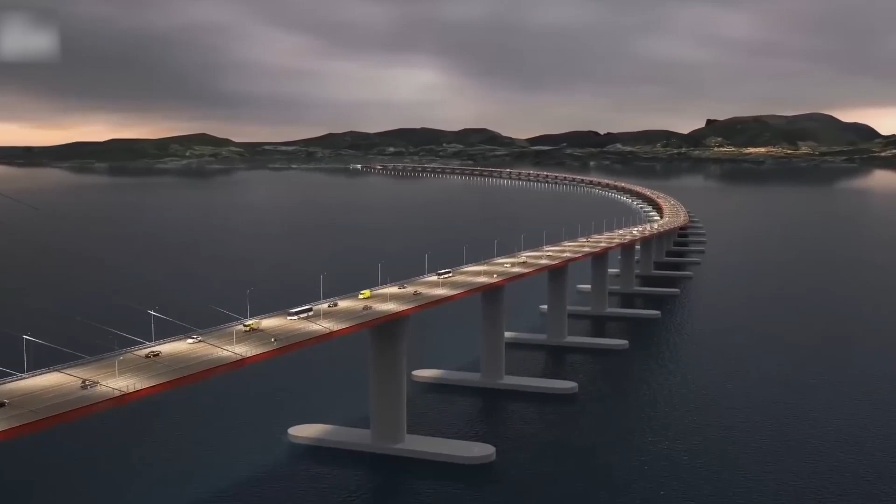Norway is no stranger to impressive feats of engineering, but the country's latest project is taking things to a whole new level. The $47 billion underwater floating highway known as the Coastal Highway Route E39 is set to be the longest and most complex transportation infrastructure endeavor in the nation's history. This mind-boggling project will feature submerged floating tunnels, bridges, and traditional tunnels, all designed to navigate the challenging terrain of Norway's fjords and mountainous regions.

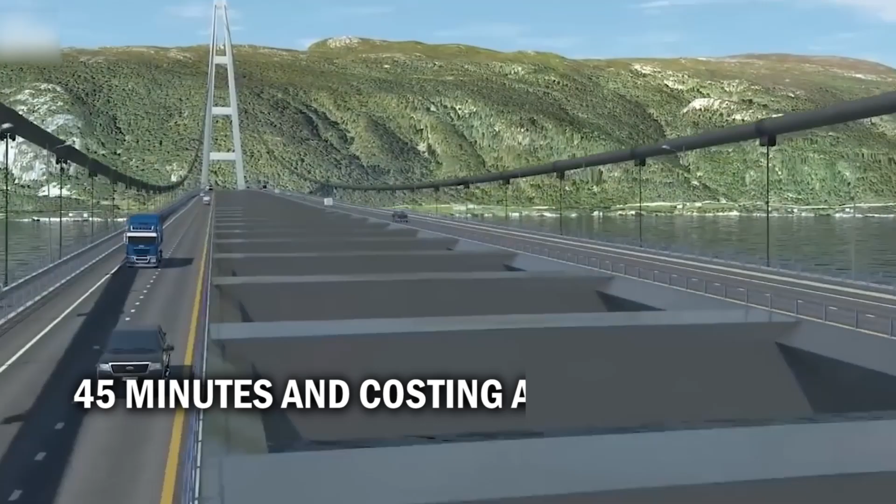The vision. Norway's vision for the E39 coastal highway is a bold one, aiming to transform transportation along the country's western coast. At its core, the project seeks to drastically improve connectivity and reduce travel times between key cities and towns. By eliminating the need for 7 ferry crossings, each taking around 45 minutes and costing about $16 per trip, the new highway will cut the journey from Kristiansand to Trondheim from 21 hours to just 11. This seamless, uninterrupted route will make travel more efficient and predictable for residents, businesses, and tourists alike.

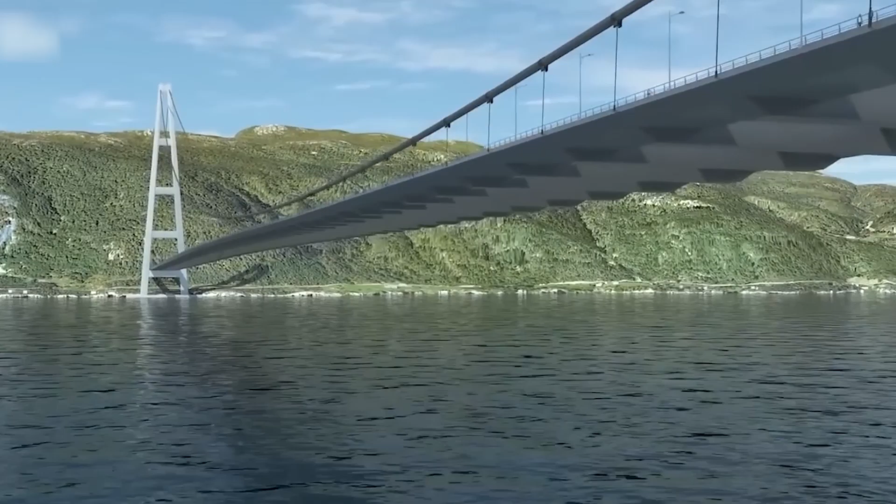But the ambitions of the E39 project extend far beyond mere convenience. The highway is seen as a vital tool for urban stabilization and revitalization in rural and remote areas along the coast. Many of these regions, such as Tysnes, have seen significant population declines over the past century due to their inaccessibility. By providing easier access to essential services like healthcare, education, and employment opportunities, the E39 has the potential to make these areas more livable and attractive, potentially reversing long-standing demographic trends.

The economic benefits of the project are also substantial, with 60% of Norway's exported goods produced along the west coast, where a third of the population resides. Improving transportation infrastructure is crucial for boosting efficiency and reducing costs. The E39 will streamline logistics for goods, making it easier and faster to move products from factories to ports and beyond. This in turn is expected to stimulate economic growth and create new opportunities for businesses and communities along the route.

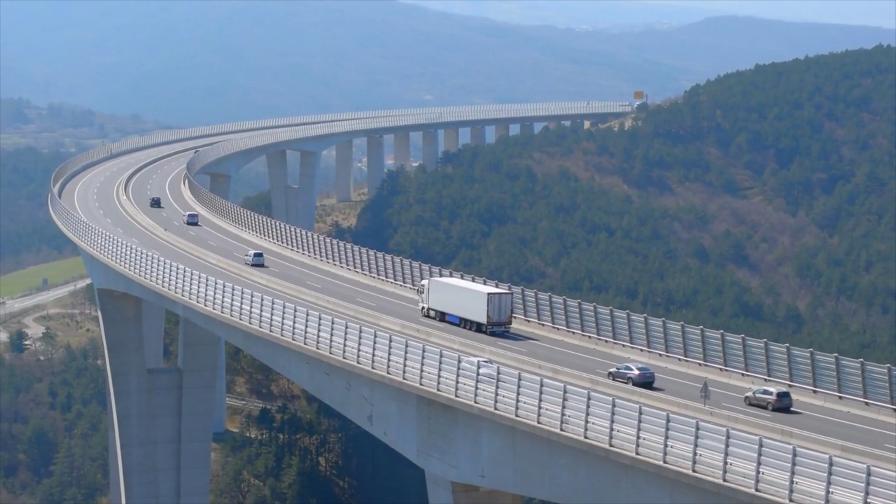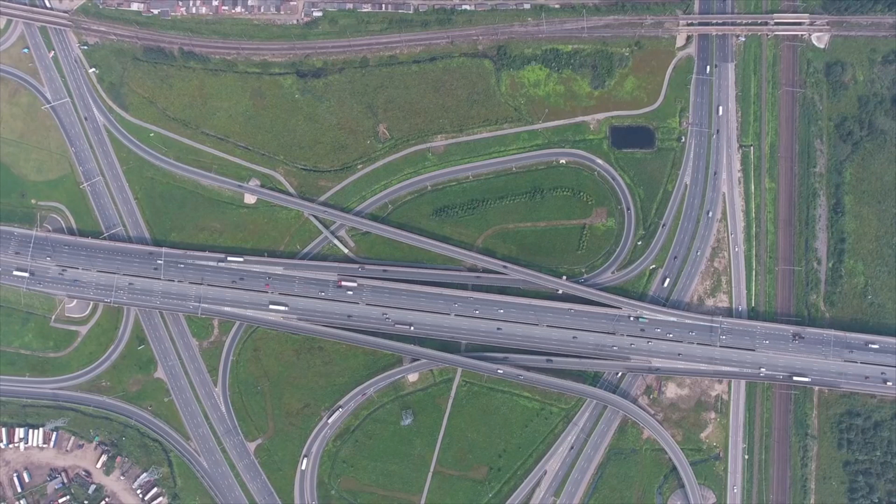Moreover, the E39 coastal highway is designed to showcase Norway's commitment to environmental sustainability and preservation. Traditional road infrastructure, such as bridges and standard tunnels, can have significant ecological drawbacks. The innovative solutions being employed in this project, including submerged floating tube bridges, SFTBs, aim to minimize the highway's impact on the pristine natural beauty of Norway's fjords and coastline. These state-of-the-art engineering techniques not only reduce environmental disruption, but also provide greater resilience against the harsh weather conditions that often lead to road closures and ferry cancellations in the region. As the E39 project pushes the boundaries of what's possible in transportation infrastructure, it has the potential to set a new global standard.

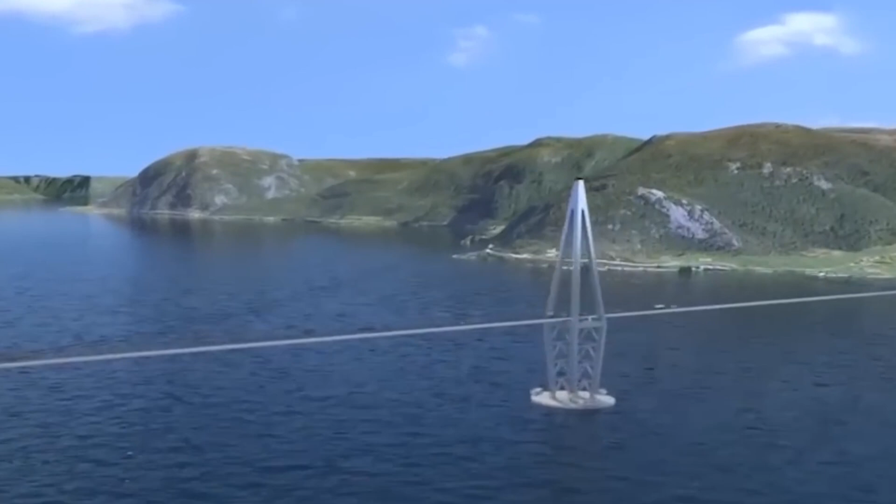Groundbreaking engineering. The Coastal Highway project is a testament to the ingenuity and innovation of modern engineering. To navigate the rugged terrain and deep fjords along Norway's western coast, the project employs a combination of conventional tunnels, bridges, and groundbreaking submerged floating tunnels, SFTBs. These engineering marvels are designed to withstand the harsh conditions of the Norwegian Sea while minimizing environmental impact and ensuring the safety of travelers.

One of the most challenging aspects of the project is the crossing of the Sognefjord, Norway's longest and deepest fjord. Engineers are considering several solutions, including a floating submerged tunnel supported by pontoons, the world's largest suspension bridge with towers reaching 435 meters, and a hybrid design that combines floating pontoon bridges with submerged tunnels. Each option presents its own set of challenges, from the immense pressures exerted on the structures to the potential impact on the fjord's ecosystem.

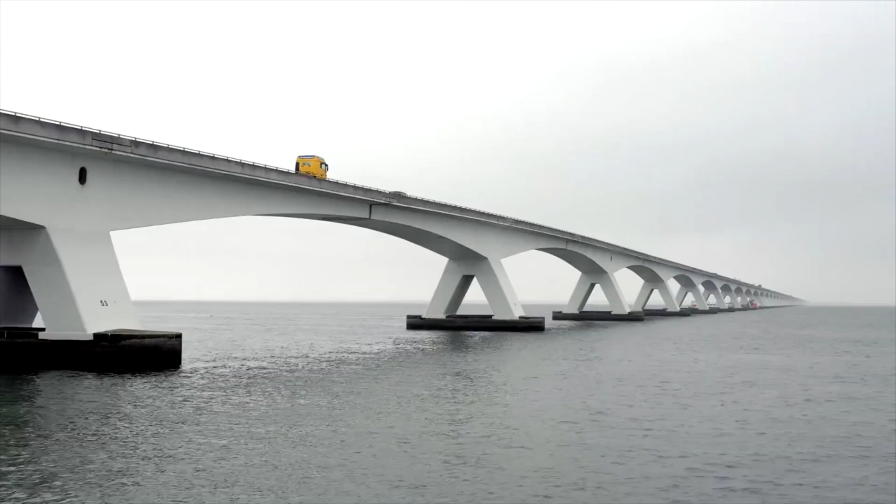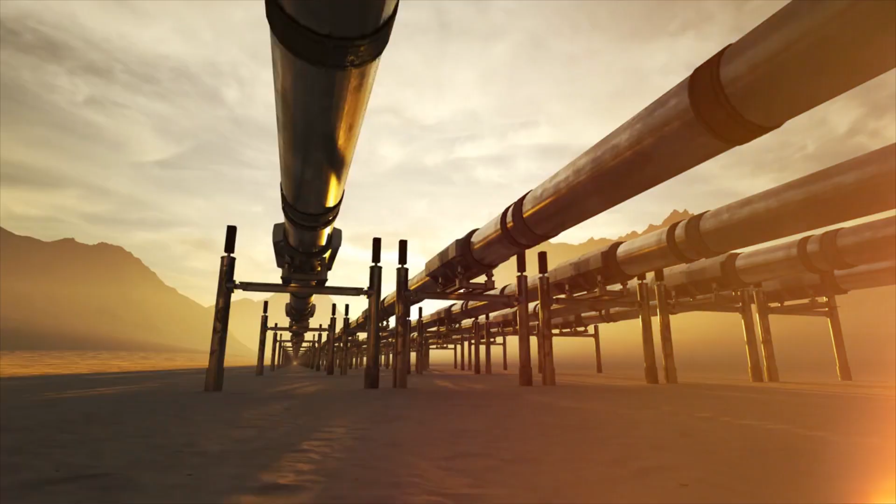The submerged floating tube bridges are a particularly innovative solution. These structures consist of concrete tubes suspended about 100 feet below the water surface, anchored to the seabed or pontoons at roughly 800-foot intervals. This design allows ships and submarines to pass safely above the tunnels while providing a stable, weatherproof passage for vehicles. The tubes are engineered to withstand the immense pressures of the deep water and the constant motion of the waves, ensuring a safe and reliable crossing for travelers.

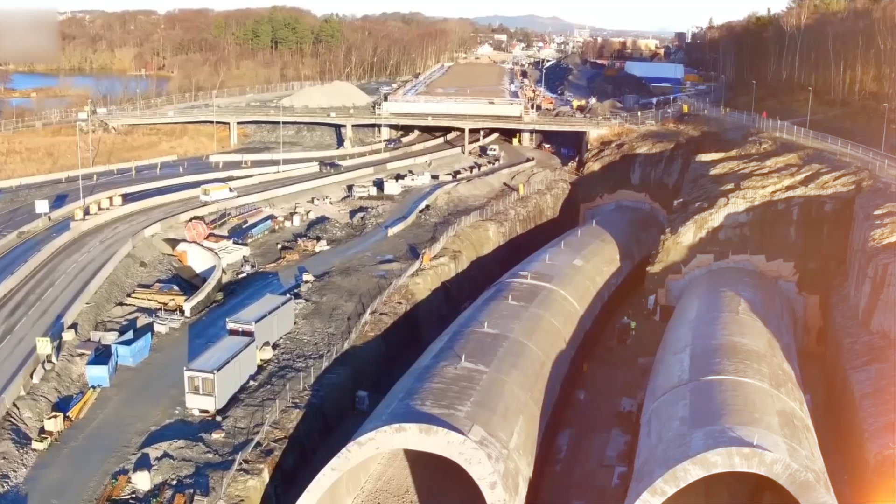Another marvel of the E39 project is the Rogfast Tunnel, which will be the longest and deepest subsea road tunnel in the world upon completion, stretching 27 kilometers and reaching depths of up to 390 meters below sea level. The Rogfast Tunnel is a feat of engineering that pushes the boundaries of what is possible in tunnel construction. The tunnel will feature emergency exits every 250 meters, along with emergency lights and phones at regular intervals, to ensure the safety of motorists in case of an emergency. The construction of these engineering marvels requires cutting-edge techniques and materials.

From the reinforced concrete used in the submerged floating tunnels to the advanced drilling and excavation methods employed in the Rogfast tunnel, every aspect of the project demands precision and innovation. Engineers must also contend with the challenges posed by the harsh Norwegian climate, including strong winds, heavy rainfall, and the potential for seismic activity. Despite the immense challenges, the engineers behind the E39 Coastal Highway project remain undaunted.

They are driven by a vision of a more connected, sustainable, and prosperous future for Norway's western coast. By pushing the limits of what is possible in transportation infrastructure, they are not only transforming the way people travel within the country, but also setting a new global standard for innovative, environmentally conscious design. However, bringing this ambitious vision to life is no easy feat.

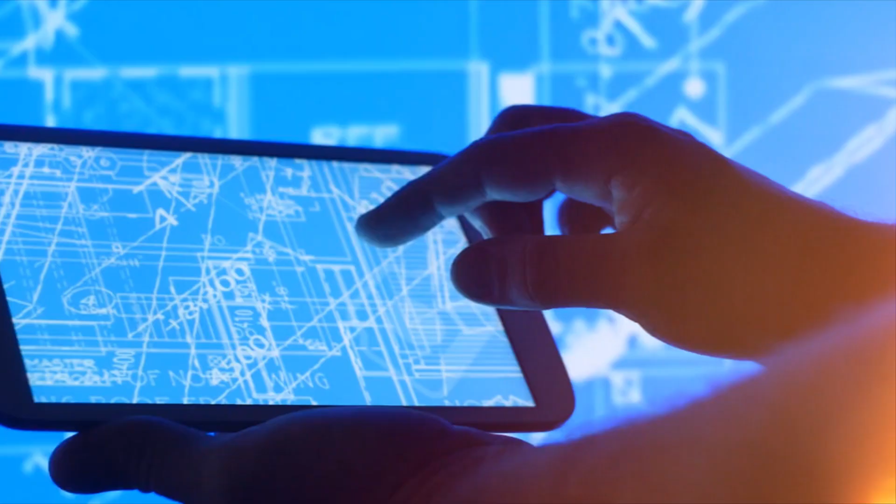Engineering challenges. In addressing these engineering challenges, the team behind the E39 Coastal Highway project has had to devise groundbreaking solutions that push the boundaries of what's possible in modern construction. One of the most significant hurdles is navigating the deep, wide fjords that punctuate Norway's western coast. The Sognefjord crossing, for example, spans a staggering 3,700 meters and plunges to depths of 1,300 meters.

To traverse this formidable obstacle, engineers are considering a range of innovative options, from submerged floating tunnels suspended by pontoons to a record-breaking suspension bridge with towers soaring 435 meters into the sky. The Submerged Floating Tube Bridge, SFTB concept, is a particularly inventive approach to fjord crossings. While the idea itself dates back to the late 19th century, only recent advancements in materials science and engineering have made it a viable solution.

The proposed design involves anchoring concrete tubes to the seabed or floating pontoons at regular intervals, allowing them to sit about 100 feet below the water's surface. This positioning ensures that ships and submarines can pass safely overhead while providing a stable, weatherproof route for vehicles. However, the immense pressures exerted on the structure at such depths present a significant challenge, requiring engineers to carefully calculate and reinforce the tubes to withstand the constant stress.

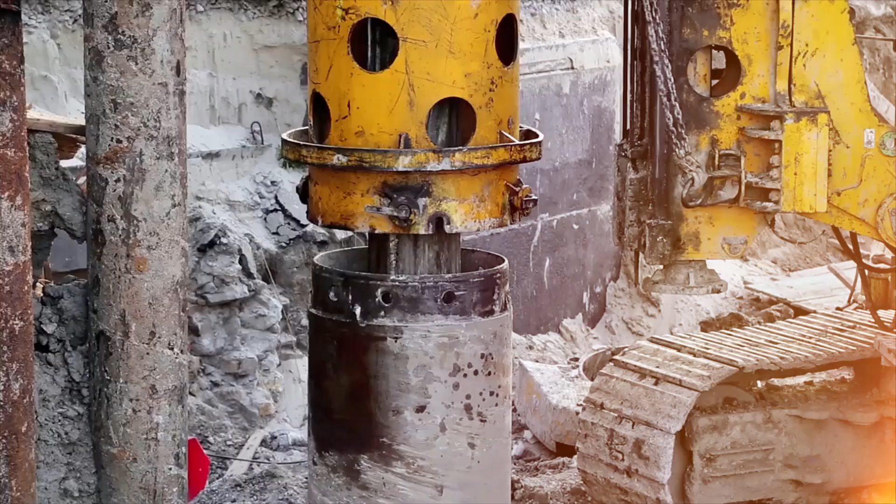Another major engineering feat is the Rogfast tunnel, set to become the world's longest and deepest subsea road tunnel. Boring through 27 kilometers of rock and reaching depths of up to 390 meters below sea level, this tunnel pushes the limits of conventional drilling and excavation techniques. Engineers must contend not only with the sheer scale of the project, but also with the geologic complexities of the Norwegian seabed, which can include unstable rock formations and seismic activity. To ensure the safety of motorists, the tunnel will feature emergency exits, lights, and phones at regular intervals, adding another layer of complexity to the design and construction process.

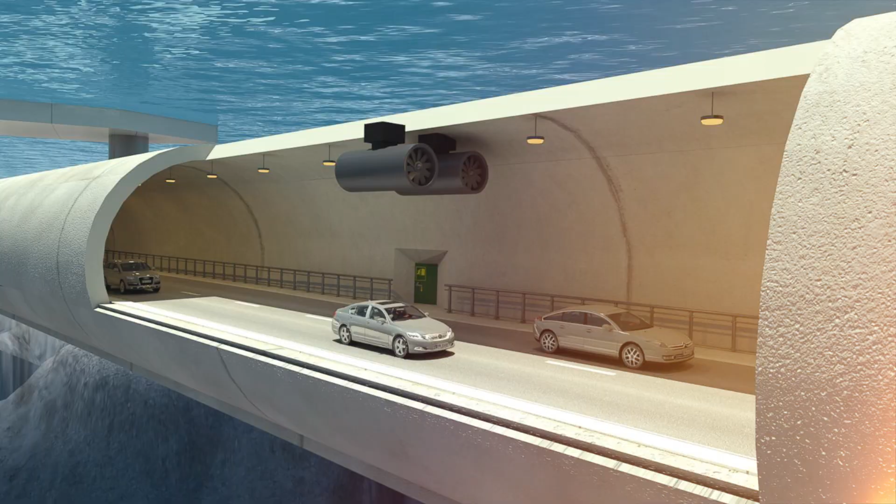Beyond the fjords and tunnels, the rugged terrain of Norway's western coast presents its own set of challenges. The E39 Coastal Highway must navigate steep cliffs, rocky outcroppings, and areas prone to landslides and avalanches. To mitigate these risks, engineers are employing advanced geotechnical analysis and monitoring systems, allowing them to identify potential hazards and adapt the design accordingly. In some cases, this may involve reinforcing hillsides, constructing protective barriers, or even rerouting the highway to avoid particularly treacherous areas.

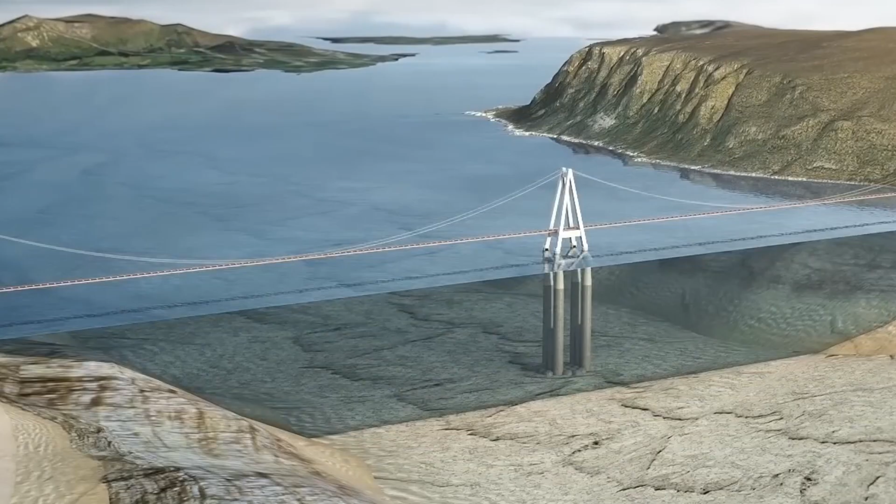Throughout the project, engineers must also consider the environmental impact of their work. The Norwegian Public Roads Administration has been studying the country's natural landscape for years to determine how to construct the E39 with minimal disruption to local ecosystems. This involves careful route planning to avoid sensitive habitats, as well as the use of sustainable materials and construction methods wherever possible. As engineers continue to grapple with these myriad challenges, they are also exploring cutting-edge materials and technologies that could revolutionize the way we build transportation infrastructure.

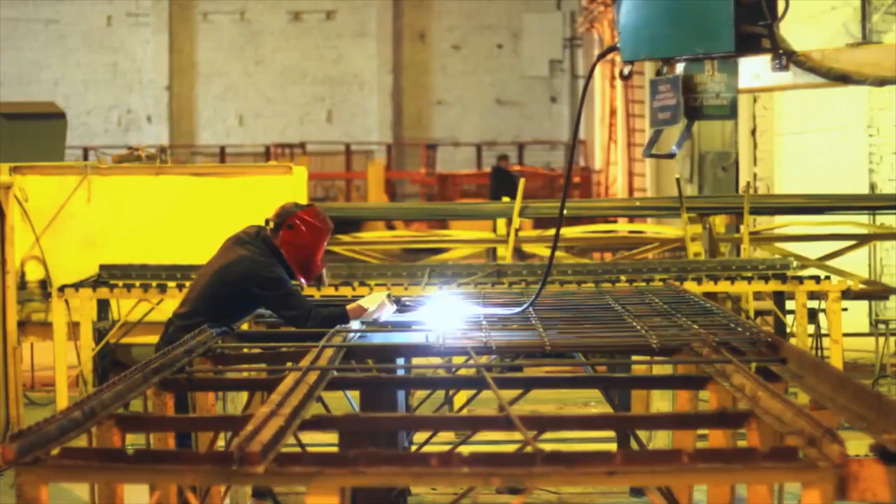Materials and construction. The materials and construction of the E39 Coastal Highway are as impressive as the engineering feats themselves. Transporting and compiling the materials needed for these groundbreaking structures presents a unique set of challenges, especially in the harsh marine environments of Norway's western coast. From the reinforced concrete tubes used in the submerged floating tunnels to the steel cables and floating pontoons that keep them stable, every component must be carefully manufactured, shipped, and put into place with precision.

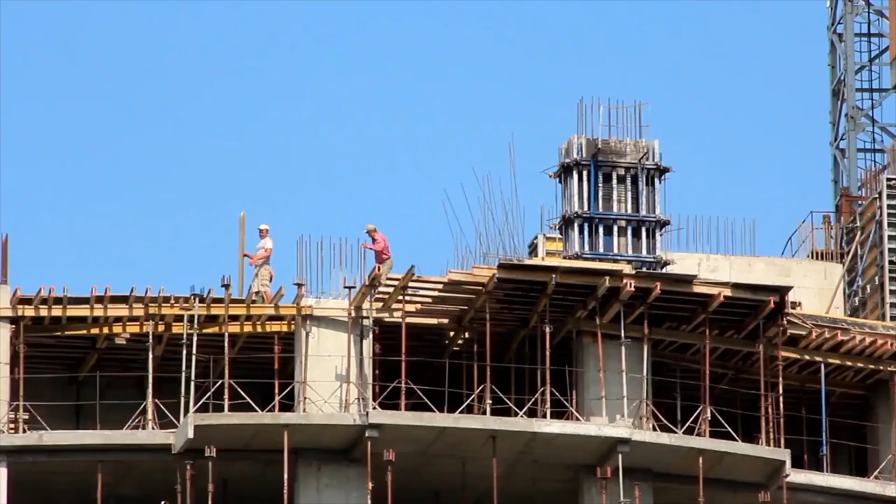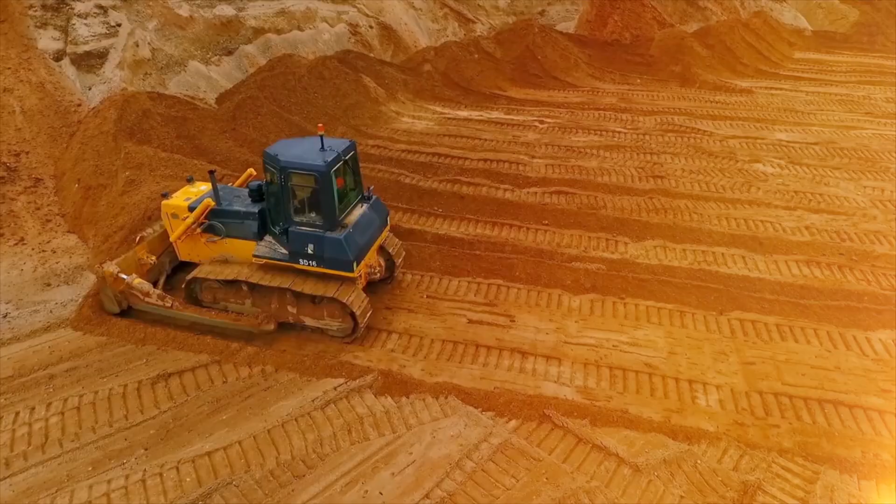One of the most critical materials in the construction of the floating tunnels is advanced polymers. These high-strength, lightweight materials are essential for creating the buoyant segments that will support the concrete tubes beneath the water's surface. The polymers must be able to withstand the constant pressure of the deep sea while also resisting corrosion and degradation over time. To ensure the highest quality, these components are typically manufactured on land and then transported to the construction site by specialized vessels. Steel also plays a vital role in the construction of the E39 Coastal Highway.

From the cables that anchor the floating pontoons to the reinforcing bars that strengthen the concrete tubes, steel is used throughout the project for its durability and tensile strength. However, working with steel in marine environments presents its own set of challenges. The material must be treated to resist corrosion from salt water and protected from the constant motion of the waves and currents. Transporting these massive steel components to the construction site is no small feat.

The cables and reinforcing bars are typically manufactured on land and then loaded onto specialized barges or ships for transport to the fjords. Once there, they must be carefully maneuvered into place using cranes and other heavy machinery designed to operate in marine environments.

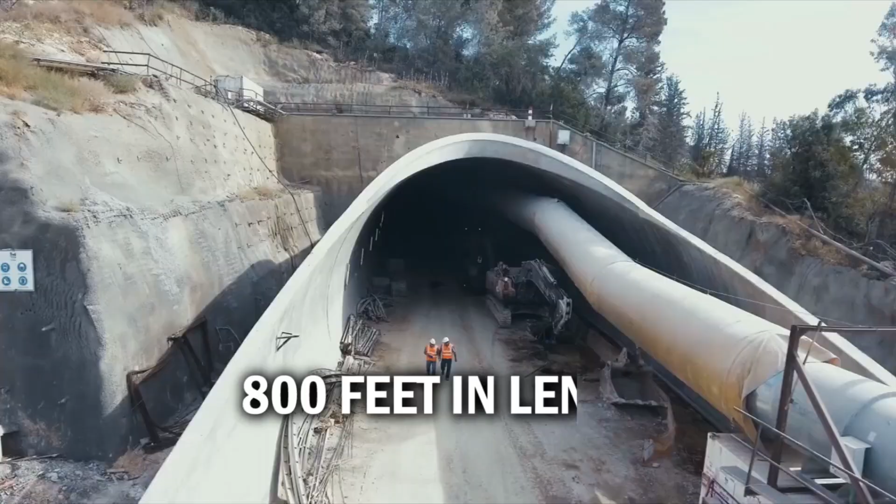The floating pontoons that support the submerged tunnels are another critical component of the E39 coastal highway. These massive structures, which can measure up to 800 feet in length, are typically made from reinforced concrete and are designed to provide a stable platform for the tunnel segments. Like the other components, the pontoons are manufactured on land and then towed to the construction site by powerful tugboats.

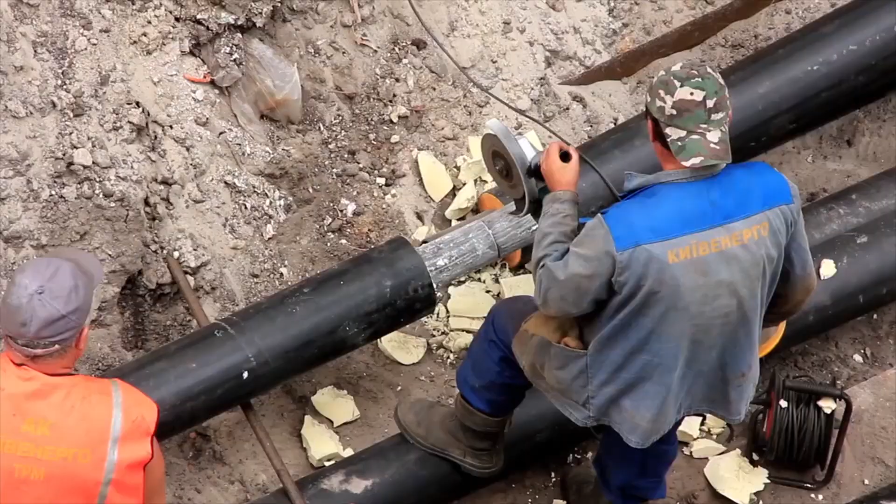Once all the components are in place, the real work of assembling the floating tunnels begins. This is a delicate and time-consuming process that requires specialized equipment and highly skilled workers. The concrete tubes must be carefully lowered into place and connected to the floating pontoons using steel cables and other anchoring systems. The tubes themselves must be sealed and pressurized to create a stable, waterproof environment for vehicles to pass through.

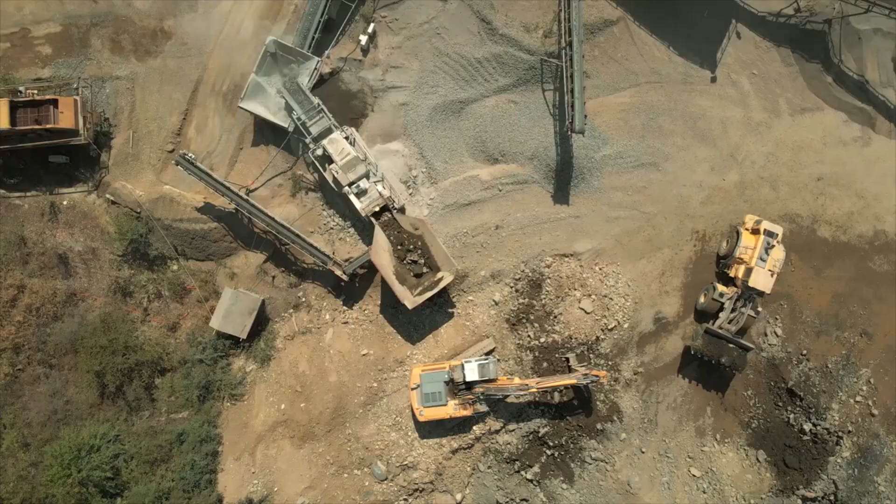Throughout the construction process, engineers must also contend with the challenges posed by Norway's harsh coastal weather. High winds, heavy rainfall, and strong currents can all impact the safety and efficiency of the work, requiring careful planning and constant monitoring to ensure that the project stays on track.

Despite the immense challenges involved, the construction of the E39 coastal highway is a testament to the ingenuity and perseverance of the engineers and workers involved. By combining cutting-edge materials and innovative construction techniques, they are bringing to life a vision of a more connected, sustainable future for Norway's western coast.

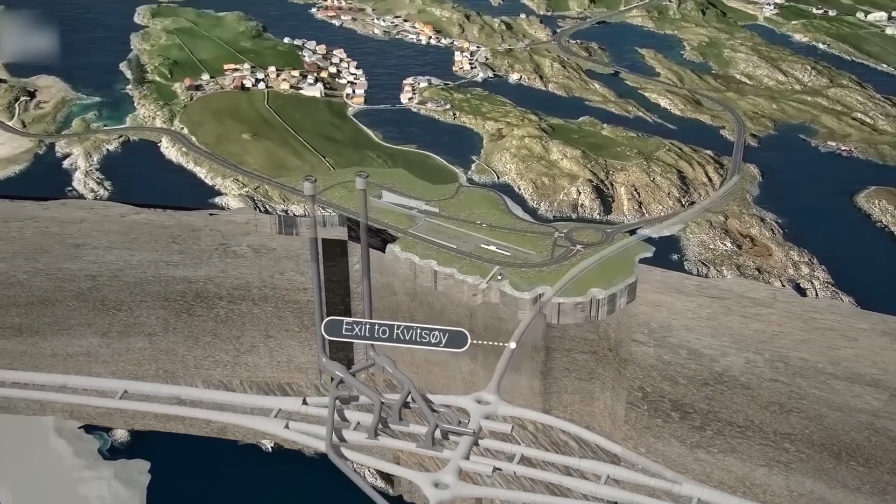However, with such ambitious engineering comes the need for equally rigorous safety measures. From emergency exit strategies to fire suppression systems, the E39 coastal highway must be designed with the utmost attention to detail to ensure the well-being of the travelers who will traverse its tunnels and bridges.

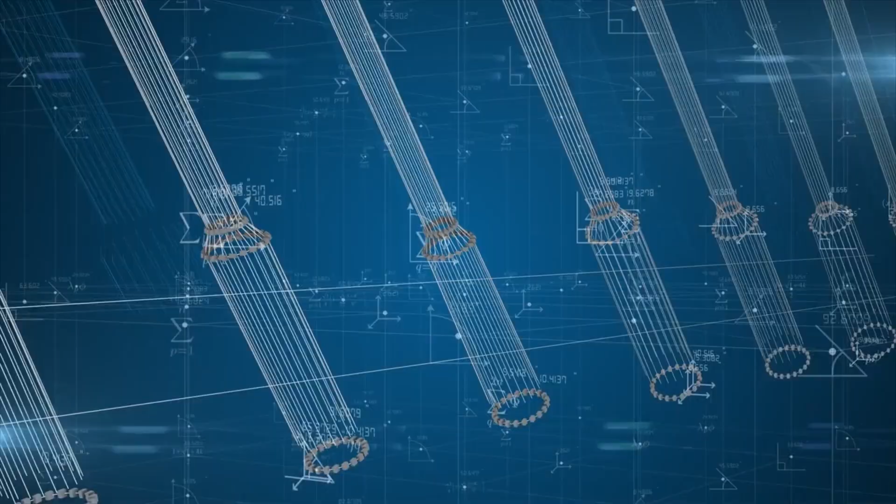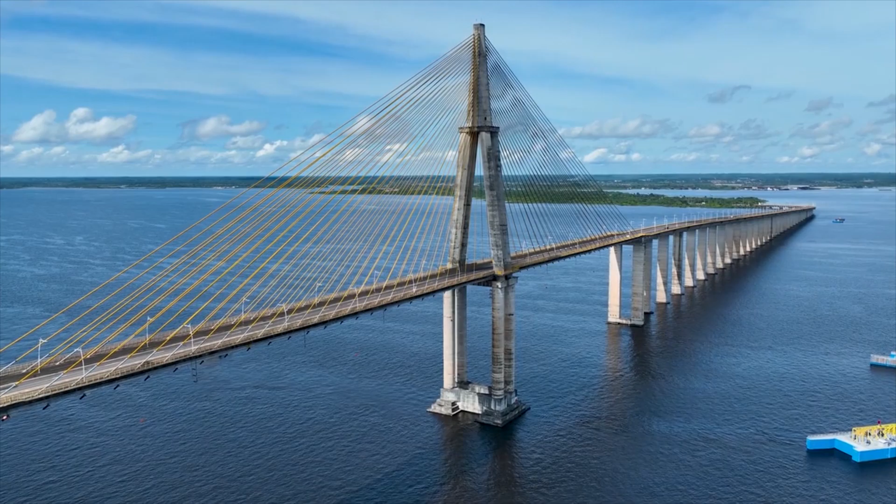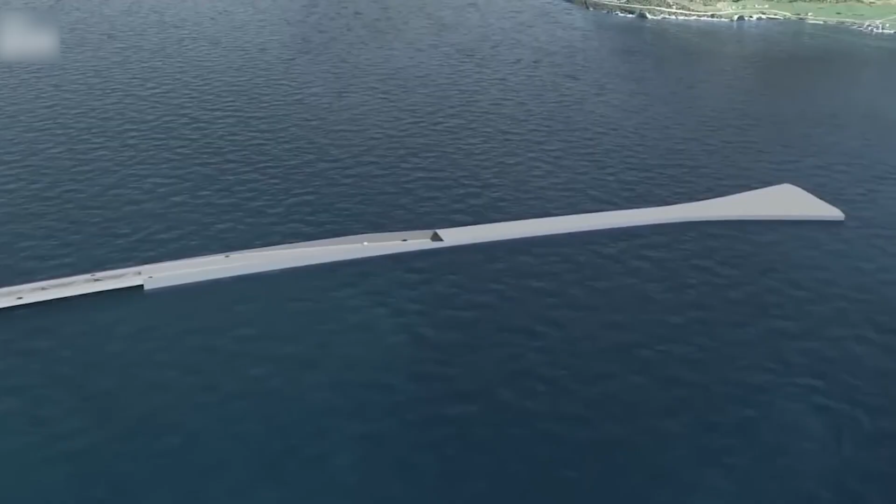Safety measures. Securely at the forefront of the E39 coastal highway project, engineers have implemented a comprehensive array of measures to ensure the secure passage of motorists through the tunnels and across the bridges. The Rogfast Tunnel, a critical component of the new coastal highway, exemplifies this commitment to safety, featuring emergency exits at 250-meter intervals throughout its length. These strategically placed exits provide a vital lifeline for travelers in the event of an unforeseen crisis, allowing them to quickly and safely evacuate the tunnel if necessary.

In addition to the emergency exits, the Rogfast Tunnel is equipped with a network of emergency lights and phones positioned at regular intervals along the route. These essential communication and illumination systems ensure that motorists can maintain contact with emergency services and navigate their way to safety, even in the face of a power outage or other technical failure.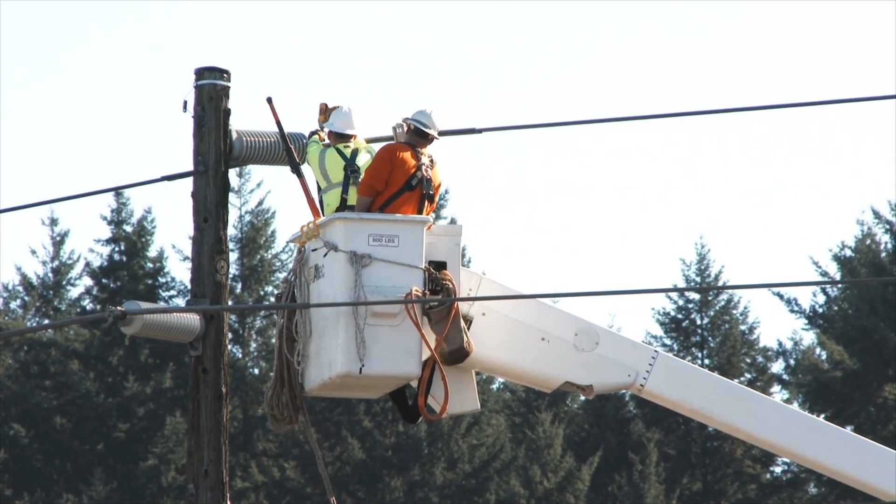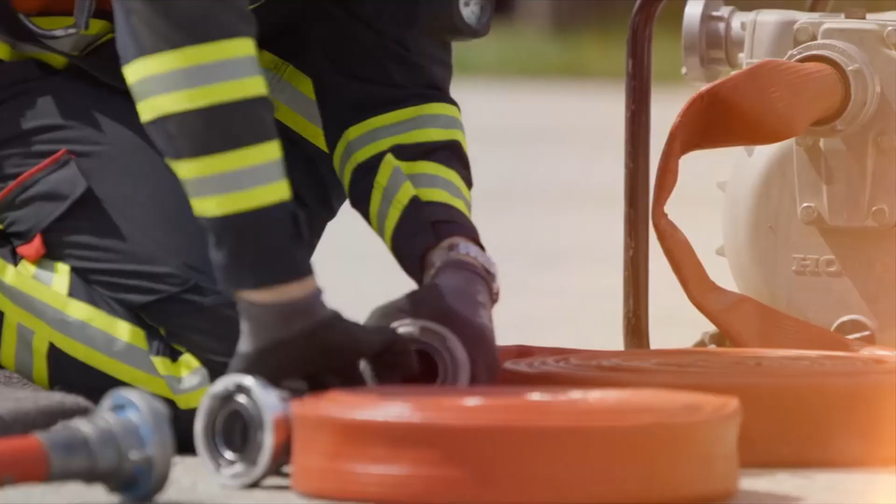Fire and explosion safety are also paramount concerns in the design of the E39 coastal highway. To mitigate these risks, Norwegian engineers have conducted extensive small-scale fire and explosion tests within the tunnels. These controlled experiments simulate worst-case scenarios, such as a collision between large vehicles or a truck carrying hazardous materials, enabling engineers to develop robust safety protocols and design features that can withstand even the most extreme conditions.

The submerged floating tube bridges, SFTBs, present their own unique set of safety challenges, which engineers have addressed through meticulous design and planning. By positioning the SFTBs at depths between 20 and 50 meters below the water's surface, engineers have ensured that the structures are protected from potential collisions with surface water traffic, while also maintaining manageable water pressure levels.

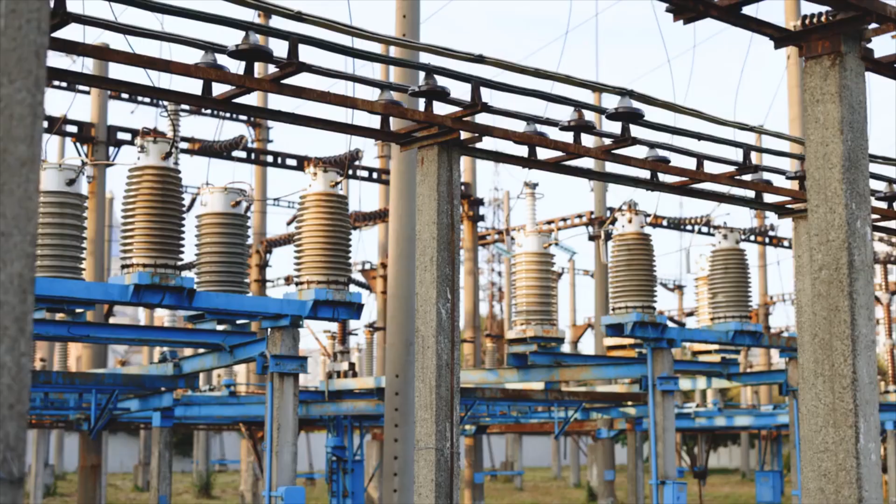The floating tunnels are further stabilized by a system of cables anchored to the seabed or pontoons floating at regular intervals along the surface. The pontoon system in particular offers an added layer of safety by making the tunnel's location visible to boats and ships above. Despite these precautions, engineers have also developed an extensive emergency response strategy specifically tailored to the unique challenges of the SFTBs.

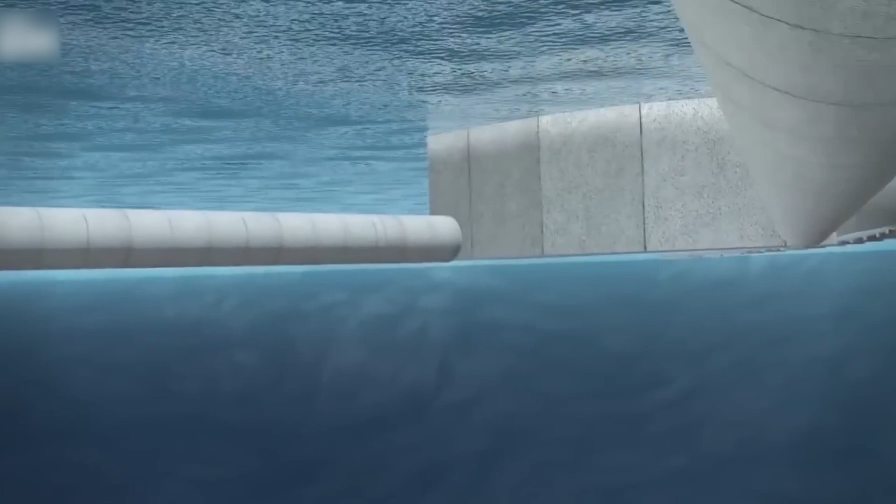This comprehensive plan includes standardized exit procedures for motorists, as well as a dedicated response team that can swiftly access the tunnels in the event of an emergency. Much like conventional tunnels, the submerged portions of the E39 coastal highway feature escape routes that allow travelers to safely return to the surface should the need arise.

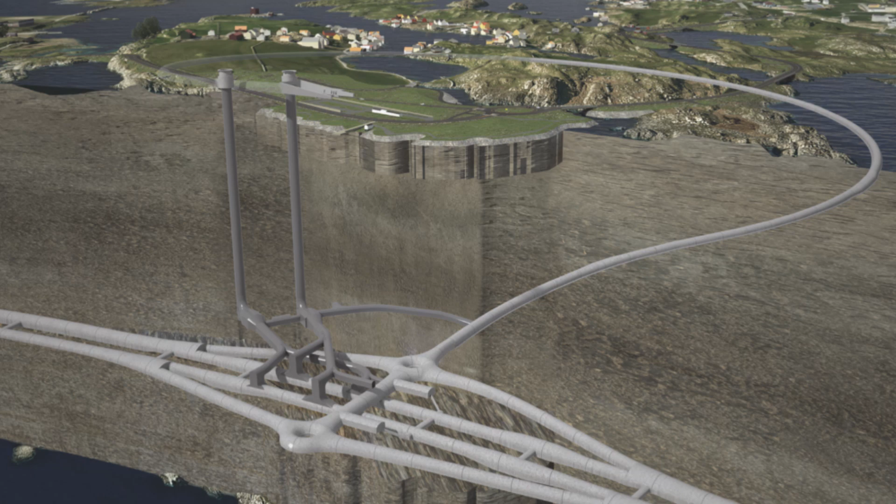The mid-route intersection of the Rogfast Tunnel, which connects to the island of Kvitsøy, serves as a microcosm of the project's overarching commitment to safety. This critical juncture incorporates the same rigorous safety measures found throughout the tunnel, including emergency exits, lighting, and communication systems, ensuring that motorists can navigate this complex intersection with confidence.

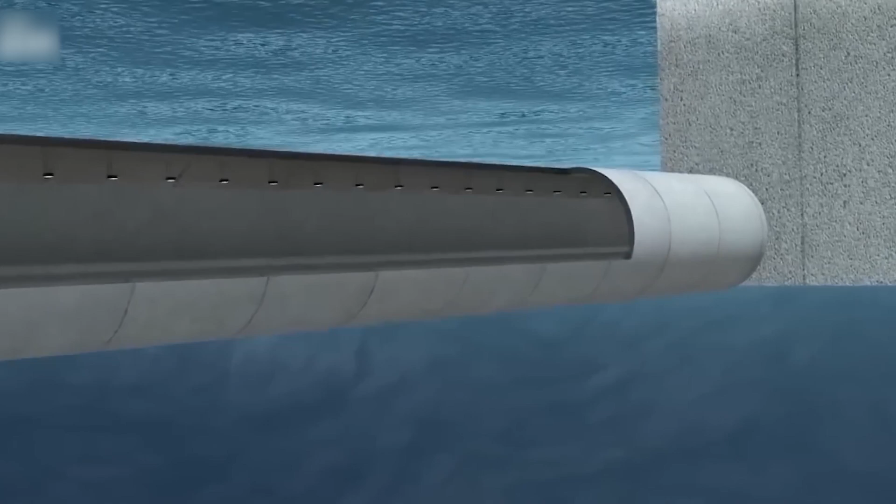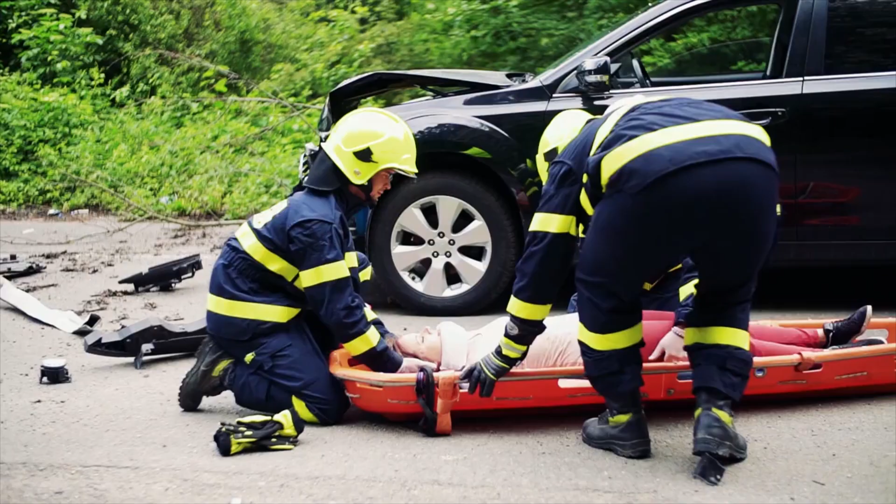As the E39 Coastal Highway project continues to push the boundaries of engineering and design, the unwavering focus on safety remains a guiding principle. By incorporating cutting-edge technology, rigorous testing, and comprehensive emergency response strategies, engineers are creating a transportation network that not only showcases the marvels of modern engineering, but also prioritizes the well-being of the travelers who will ultimately benefit from this groundbreaking infrastructure.

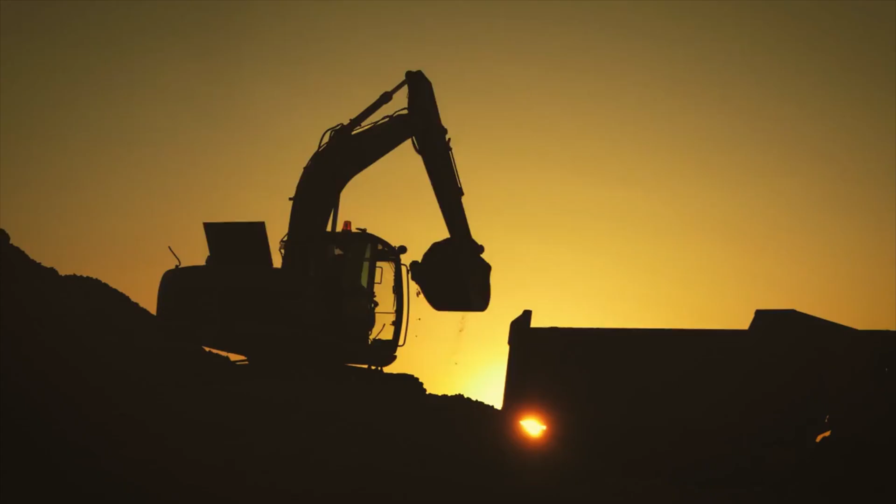Economic and environmental impact. This project's influence extends far beyond the realm of transportation, promising to reshape Norway's economic and environmental landscape in significant ways. As the country embarks on this ambitious endeavor, experts are carefully analyzing the potential benefits and challenges that lie ahead. From an economic perspective, the project is expected to yield substantial dividends. By improving connectivity between remote coastal regions and major urban centers, the E39 Coastal Highway will open up new opportunities for economic growth and development.

Tourism, in particular, is projected to experience a significant boost. With more accessible and efficient travel routes, visitors will be able to explore Norway's stunning coastal landscapes with greater ease, potentially increasing the country's annual tourism revenue, which currently stands at over 50 billion kroner, $5.6 billion USD.

Beyond tourism, the highway is also anticipated to stimulate economic activities in previously isolated areas. Improved links between islands and the mainland will foster the growth of businesses, creating jobs and revitalizing local economies. Regions like Tysnes, which have witnessed population declines due to limited accessibility, may see a reversal in this trend as enhanced connectivity attracts new residents and enterprises.

However, as with any large-scale infrastructure project, environmental considerations remain a key concern. The engineers behind the E39 Coastal Highway are acutely aware of the need to minimize ecological disruption while maintaining the natural beauty that makes Norway's coastal regions so iconic. To address this challenge, innovative solutions like submerged floating tube bridges, SFTBs, have been proposed as an alternative to traditional bridges. By positioning these structures beneath the water's surface, engineers aim to preserve the visual aesthetics of the landscape, reducing the highway's impact on the pristine fjords and islands.

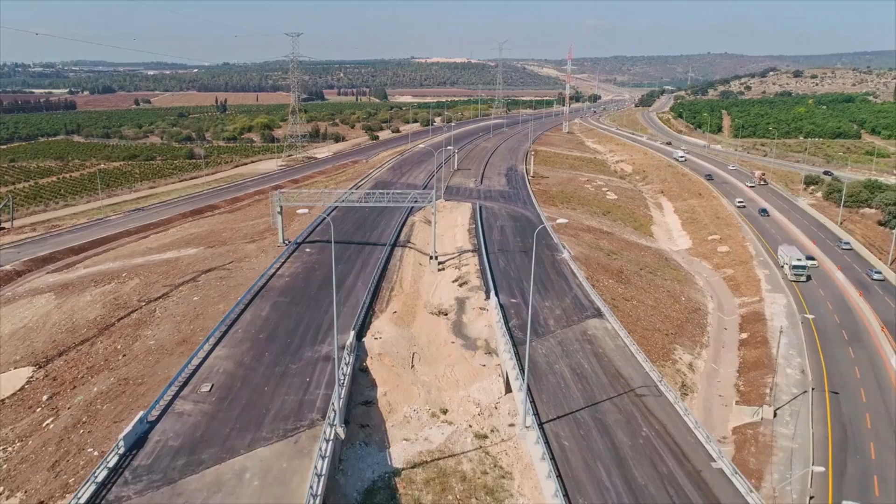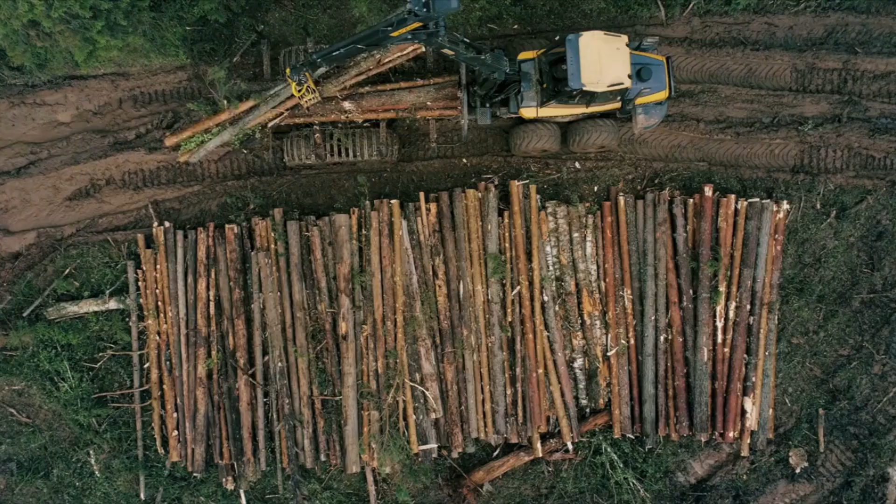Professor Niels Erik Anders Ronquist, a key figure involved in the project, encapsulates this commitment to environmental stewardship, stating, "The best and most efficient highway is the one that's almost completely hidden." This philosophy underscores the importance of striking a delicate balance between infrastructure development and ecological preservation. To ensure that this balance is maintained, the Norwegian Public Roads Administration is conducting extensive studies of the natural landscape. By gaining a deep understanding of the ecosystems along the proposed route, engineers can develop strategies to minimize lasting ecological damage during the construction and operation of the highway.

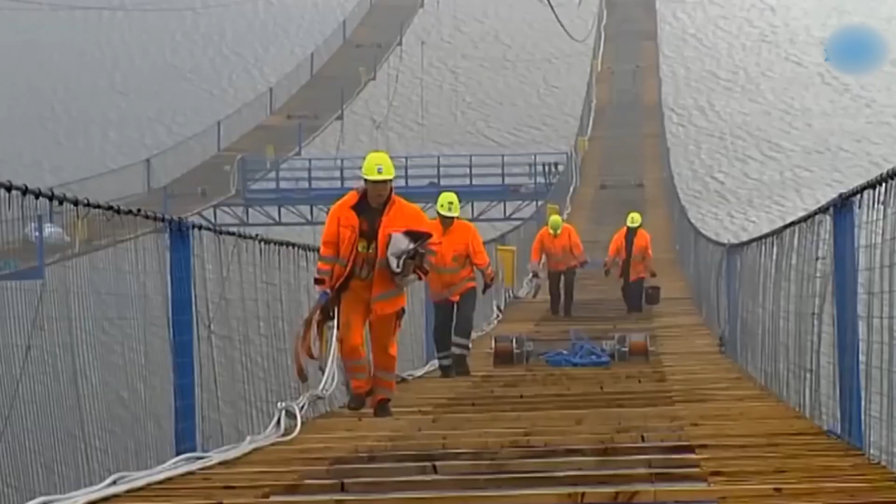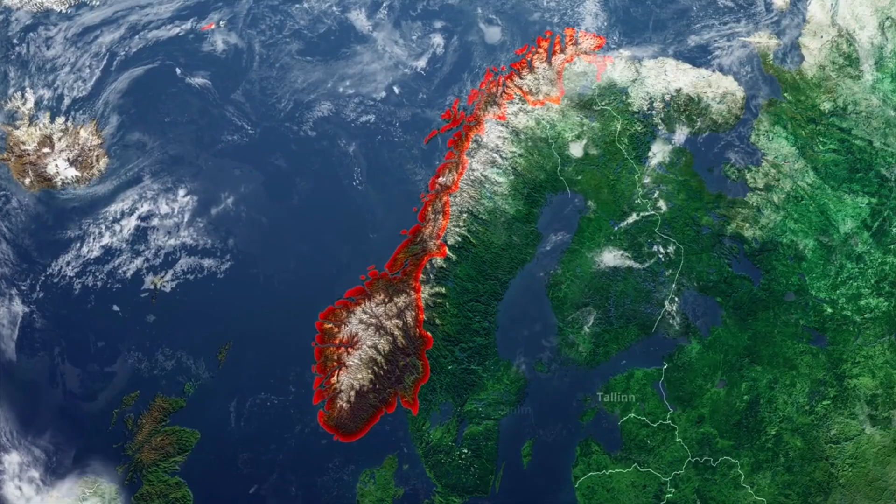This meticulous approach to environmental planning is a hallmark of the E39 Coastal Highway project, setting a new standard for sustainable infrastructure development. As Norway navigates the complex interplay between economic growth and environmental responsibility, the E39 Coastal Highway project serves as a powerful testament to the country's commitment to building a more connected, prosperous, and sustainable future. The lessons learned from this groundbreaking endeavor are poised to resonate far beyond Norway's borders, inspiring a new era of innovative, eco-conscious infrastructure projects around the globe. With the world watching, Norway's ambitious undertaking has the potential to serve as a model for similar initiatives in other countries facing comparable challenges. Global implications.

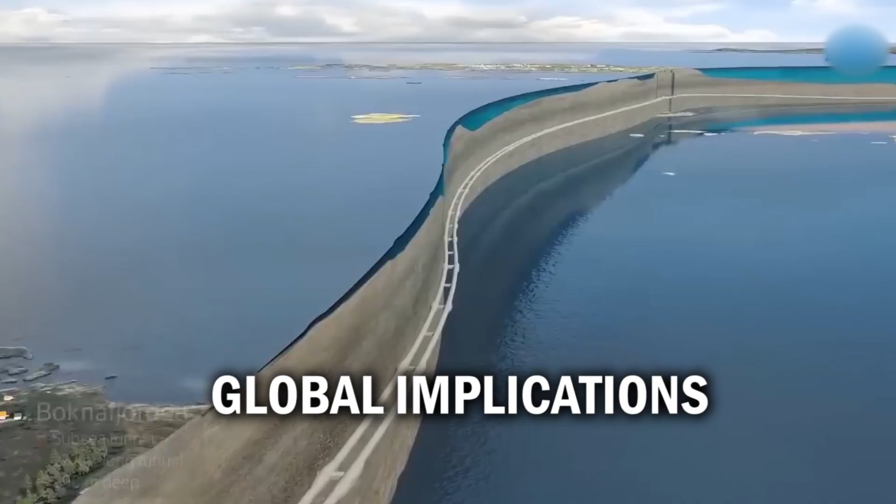As the world takes notice of Norway's pioneering E39 Coastal Highway project, the potential for this ambitious endeavor to serve as a global model for innovative infrastructure solutions becomes increasingly apparent. With countries like China and Italy already expressing interest in pursuing similar submerged floating tunnel projects, the stage is set for Norway's expertise and experience to guide the development of cutting-edge transportation networks worldwide.

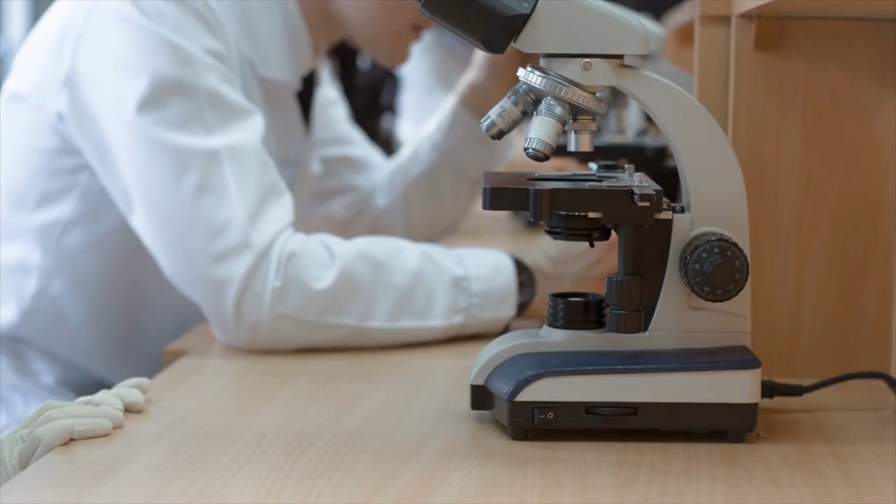The E39 project's collaborative approach, which brings together experts from various disciplines and institutions, offers a blueprint for tackling the complex challenges associated with large-scale infrastructure initiatives. By fostering partnerships between the Norwegian Public Roads Administration and researchers from esteemed universities, such as the Norwegian University of Science and Technology, the University of Stavanger, and Chalmers University of Technology, the project has created a framework for knowledge sharing and problem solving that transcends national boundaries. These international collaborations have been instrumental in addressing the myriad technical challenges posed by the E39 Coastal Highway project.

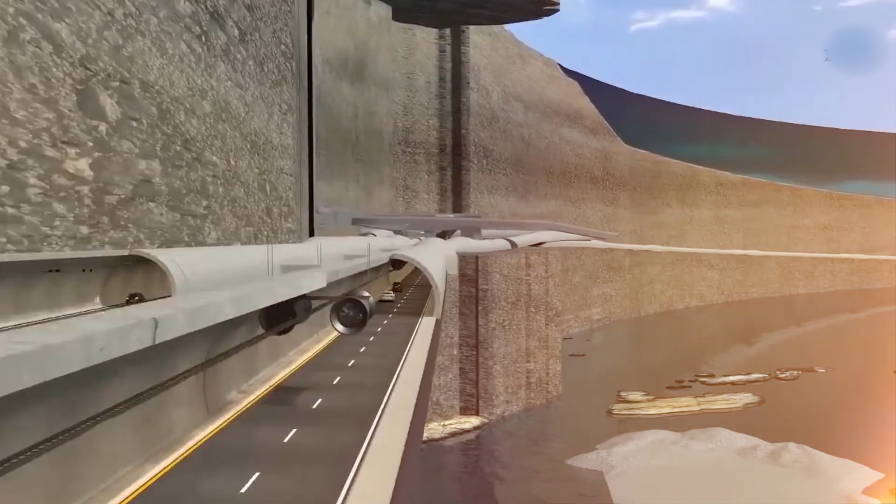With approximately 50 PhD candidates from 3 major Nordic universities working to develop solutions for issues ranging from tunnel maintenance and safety to broader infrastructure concerns, the project has become a hub for innovation and expertise that can be leveraged by other nations embarking on similar endeavors.

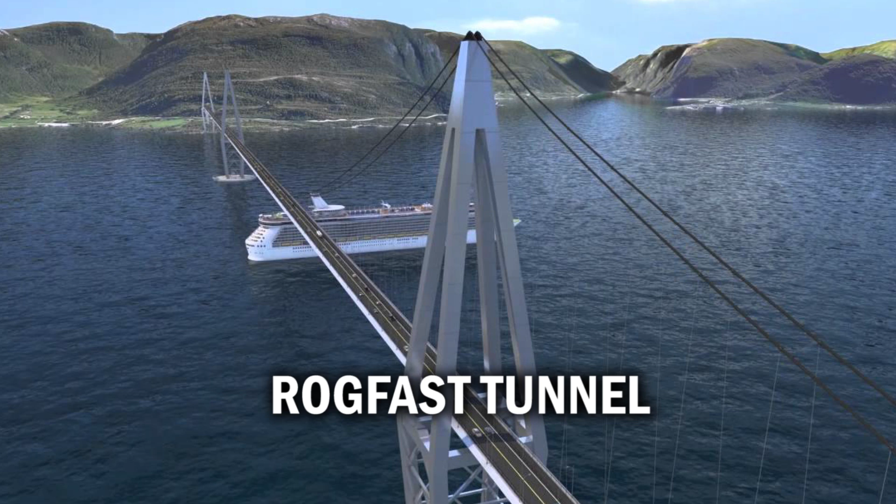As countries like China and Italy look to Norway's example, the successful completion of key components of the E39 project, such as the Rogfast Tunnel and the Sognefjord Crossing, will serve as powerful demonstrations of the feasibility and potential of submerged floating tunnels and other pioneering design solutions. By setting new engineering benchmarks, these milestones will bolster confidence in the viability of such projects and inspire other nations to adopt similar approaches to their own infrastructure challenges.

The Rogfast Tunnel in particular stands as a testament to the transformative potential of the E39 Coastal Highway project. As the world's longest and deepest undersea road tunnel, this 27-kilometer marvel will not only revolutionize travel within Norway, but also serve as a proof of concept for the safety and efficacy of submerged floating tunnels on a global scale.

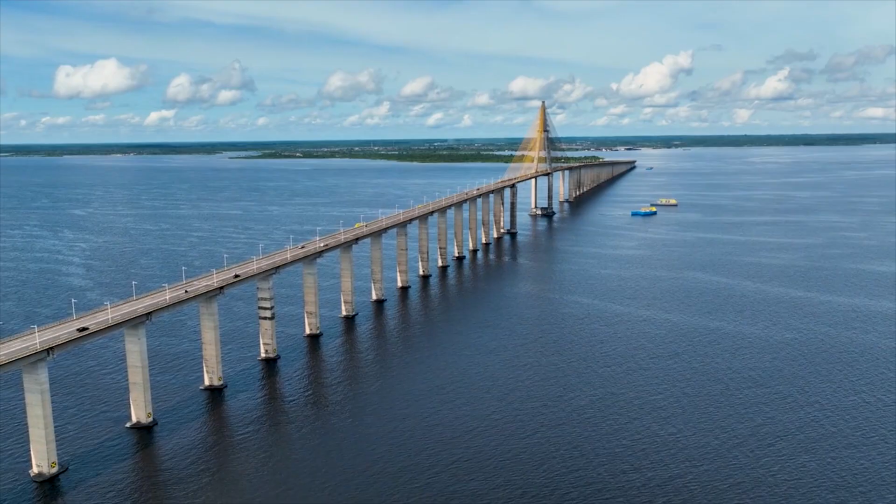Similarly, the Sognefjord crossing proposal, with its innovative combination of traditional suspension bridges, submerged floating tunnels, and hybrid floating pontoon bridges, showcases the versatility and adaptability of the solutions being developed within the E39 project. As other countries grapple with the unique challenges posed by their own landscapes and transportation needs, the Sognefjord crossing will serve as a valuable case study in the application of diverse, cutting-edge design strategies.

As Norway continues to blaze a trail in the realm of innovative infrastructure development, the ripple effects of the E39 Coastal Highway project are poised to be felt far beyond the country's borders. By setting a new standard for collaboration, innovation, and engineering excellence, Norway is not only reshaping its own transportation landscape, but also providing a roadmap for other nations to follow as they seek to build a more connected, sustainable, and prosperous future. Timeline and key milestones.

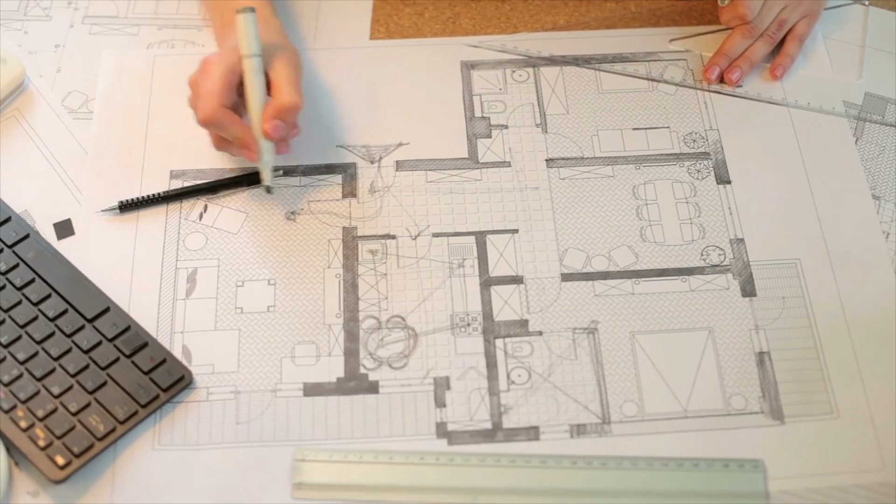As anticipation builds for the completion of key milestones, the E39 Coastal Highway project's timeline stretches out to the year 2050, a testament to the sheer scale and complexity of this groundbreaking endeavor. The journey from initial planning stages to the projected completion date is marked by a series of transformative developments, each one bringing Norway closer to realizing its vision of a more connected and prosperous future.

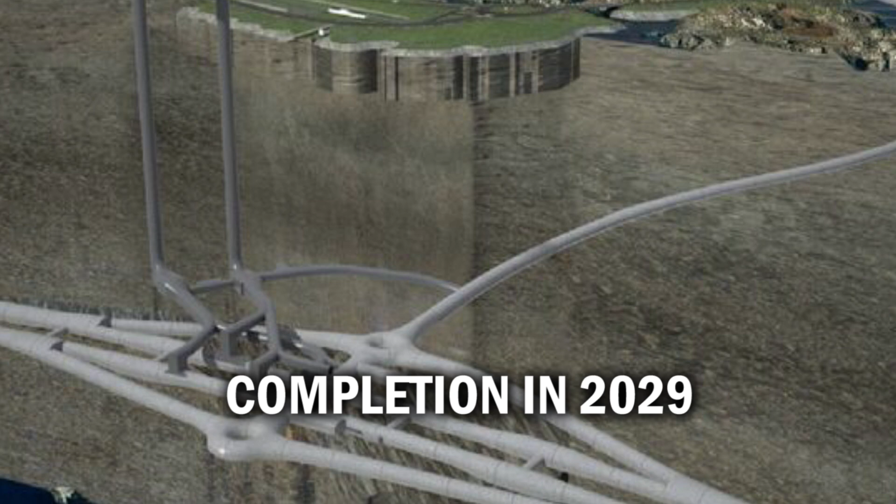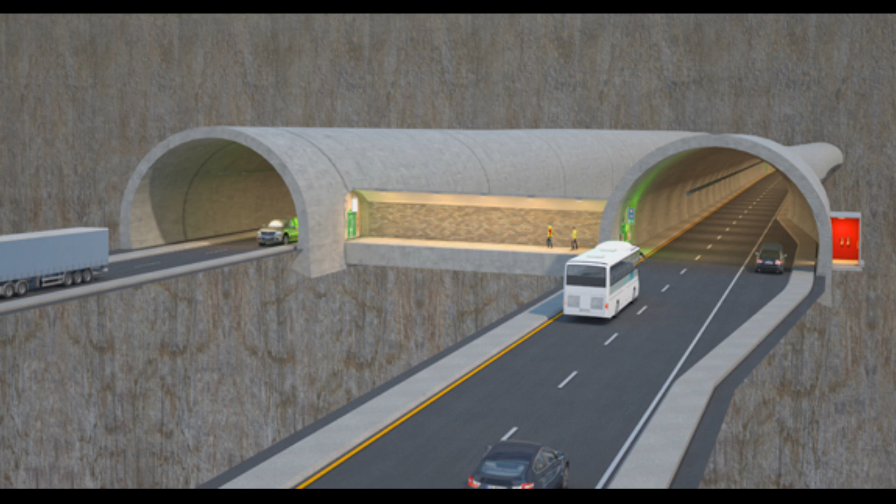The Rogfast Tunnel, a centerpiece of the E39 project, is slated for completion in 2029, having begun construction in 2018. This 27-kilometer subsea marvel will not only revolutionize travel between Kristiansand and Trondheim, but also serve as a powerful demonstration of the feasibility and potential of submerged floating tunnels on a global scale. With depths reaching up to 390 meters below sea level, the Rogfast Tunnel will set new engineering benchmarks and bolster confidence in the viability of similar projects worldwide.

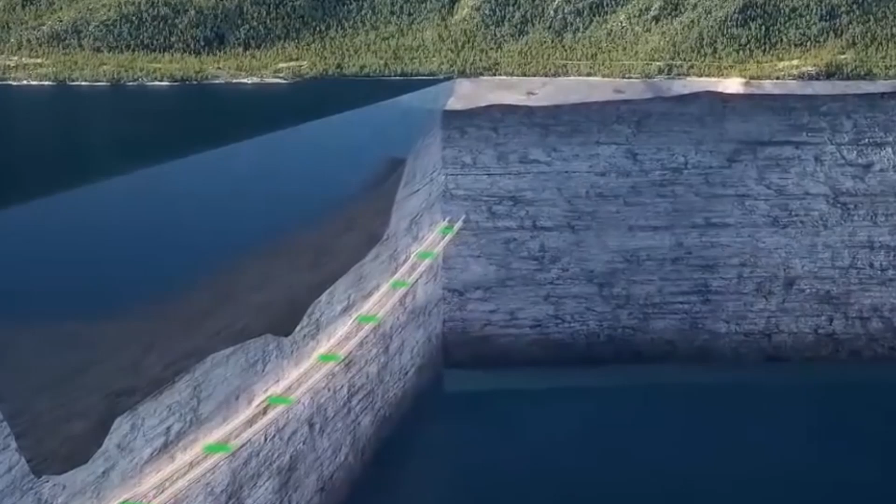As work on the Rogfast Tunnel progresses, planning and potential construction of other innovative structures, such as the Sulafjorden Bridge, the Sognefjord Crossing, and the Bjørnafjord Floating Bridge, continue in parallel. These structures showcase the versatility and adaptability of the solutions being developed within the E39 project, with each one presenting its own unique set of engineering challenges and opportunities.

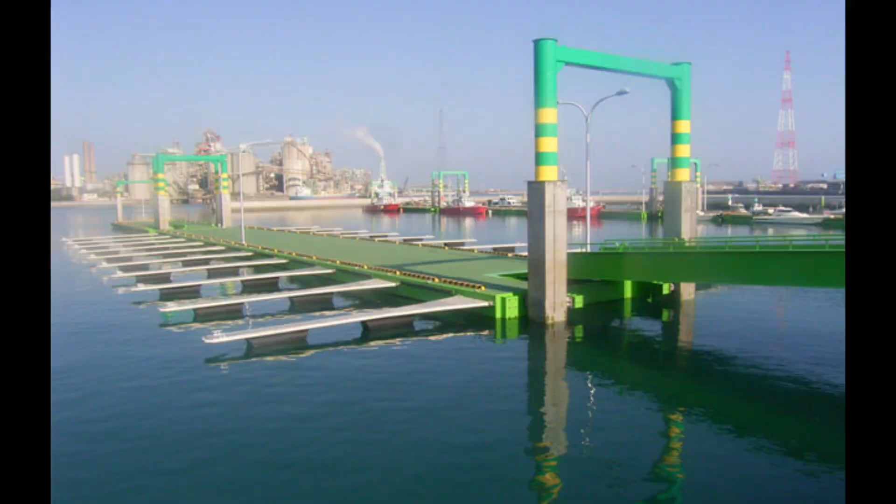The Sognefjord Crossing, in particular, stands as a testament to the project's commitment to pushing the boundaries of what is possible. With its innovative combination of traditional suspension bridges, floating bridges, submerged floating tunnels, and hybrid floating pontoon bridges, this crossing will serve as a valuable case study in the application of diverse, cutting-edge design strategies.

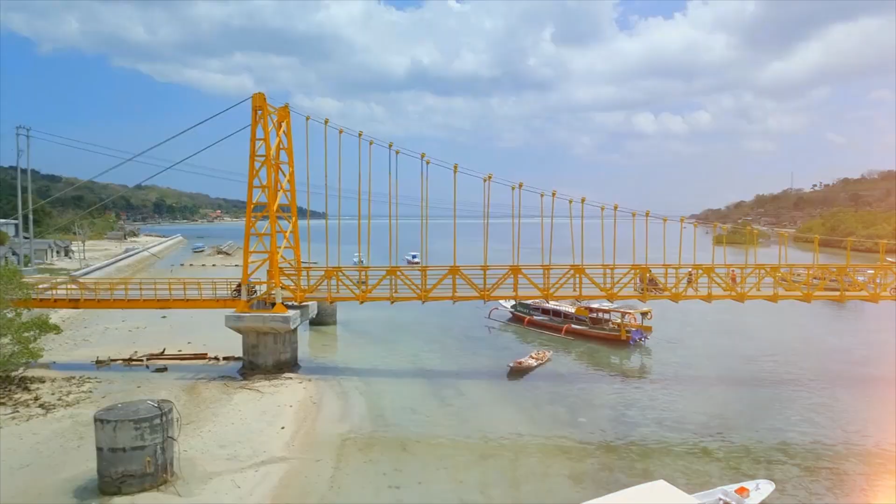As the E39 Coastal Highway project moves forward, each milestone achieved brings Norway one step closer to its goal of eliminating ferry crossings and improving connectivity between its coastal regions. The successful completion of the Rogfast Tunnel in 2029 will mark a significant turning point, demonstrating the viability of the project's ambitious vision and setting the stage for the realization of subsequent milestones.

Beyond the Rogfast Tunnel, the timeline for the E39 project is punctuated by a series of key developments, each one contributing to the gradual transformation of Norway's coastal transportation network. From the construction of the Sulafjorden Bridge to the completion of the Sognefjord crossing, these milestones will stand as testament to the ingenuity, perseverance, and collaborative spirit that have driven the project forward.

Community and cultural reactions. As progress continues on the E39 Coastal Highway project, it has elicited a spectrum of reactions from the communities it will impact most directly. While many residents express enthusiasm for the potential economic benefits and improved accessibility the project promises, others voice concerns about its cost, environmental impact, and safety implications. Supporters of the project, particularly in regions like Tysnes that have experienced significant population decline due to their previously inaccessible nature, see the underwater floating highway as a lifeline.

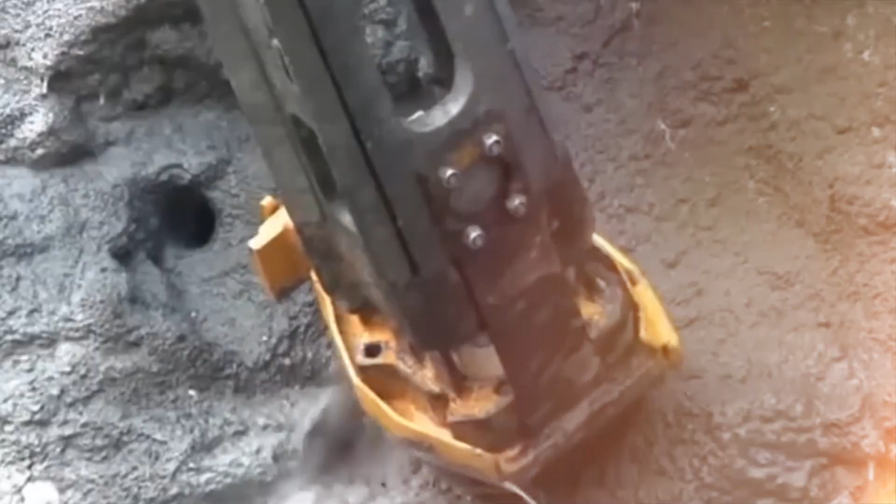Mayor Martin Kleppe of Tysnes emphasizes the inadequacy of the current ferry system, which, despite offering scenic views, presents more challenges than conveniences. He asserts that the new highway is crucial for revitalizing rural municipalities and reversing the trend of population loss. However, apprehension about the project's budget, which could exceed the estimated $47 billion, and its potential environmental consequences in Norway's pristine natural landscapes has sparked a wave of concern among some community members.

To address these issues, the Norwegian Public Roads Administration has been actively collaborating with universities, researchers, and engineers to develop solutions that minimize the project's ecological footprint and maximize safety. This collaborative approach has been instrumental in integrating community feedback into the design and execution phases of the E39 project.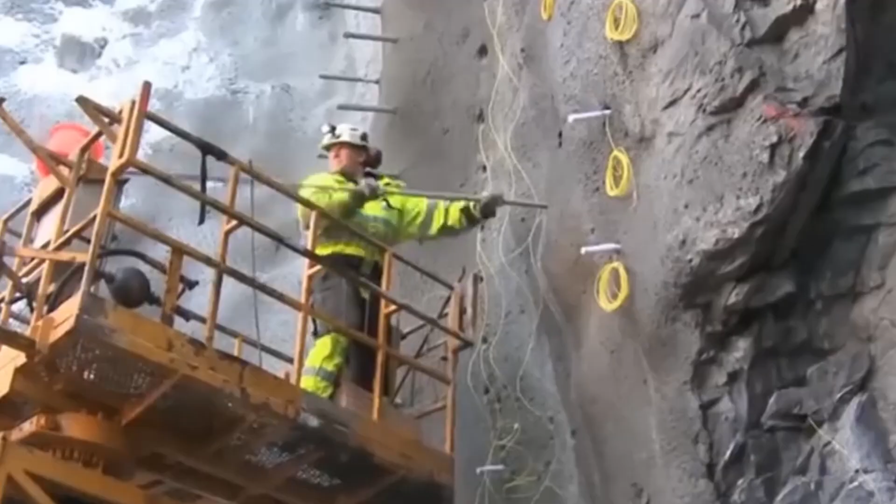By working closely with local stakeholders, the project aims to create a transportation network that not only meets the practical needs of the population, but also enhances their quality of life by improving access to essential services like healthcare, employment opportunities, and education. The promise of economic revitalization in remote areas has been a key factor in garnering local support for the project.

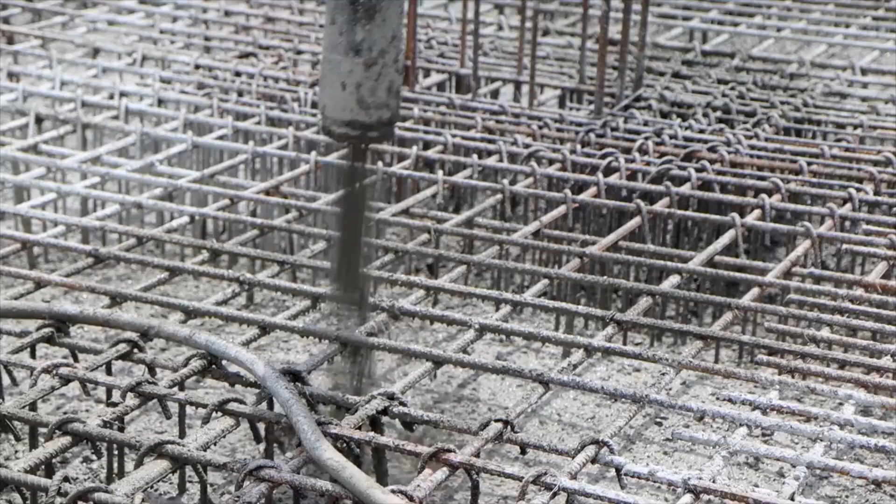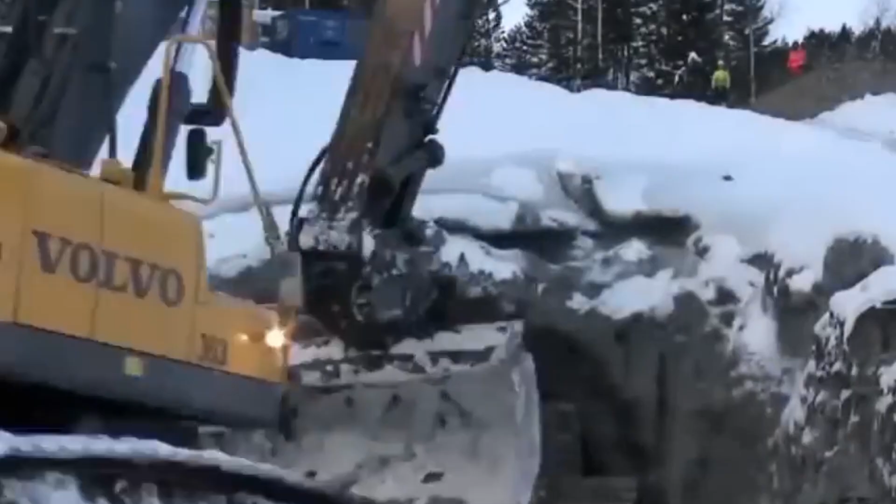With improved accessibility expected to attract new residents and businesses, many communities along the route are hopeful that the underwater floating highway will help to reverse the trend of population decline and breathe new life into their regions. As construction progresses and the project's vision begins to take shape, the Norwegian Public Roads Administration remains committed to maintaining open lines of communication with the communities along the E39 route.

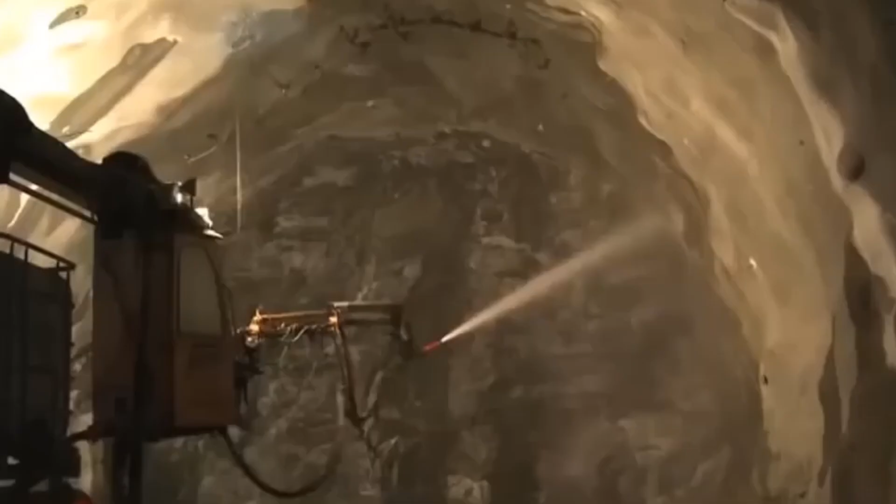By actively seeking input and addressing concerns throughout the development process, the project aims to create a transportation solution that is not only technologically innovative, but also socially and environmentally responsible. The successful integration of community feedback into the E39 Coastal Highway project serves as a model for future infrastructure initiatives, highlighting the importance of collaboration and public engagement in the planning and execution of large-scale projects.

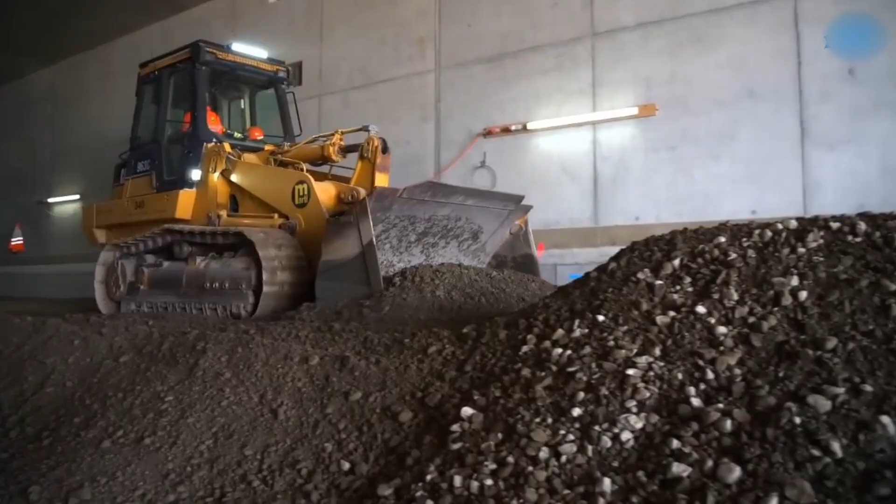Maintenance and long-term sustainability. As the project progresses towards its ambitious goals, ensuring the long-term sustainability of this monumental structure becomes a top priority. The Norwegian Public Roads Administration, NPRA, has developed a comprehensive maintenance strategy that includes regular inspections, advanced monitoring systems, and the implementation of intelligent transport systems. These measures are designed to identify potential structural issues early on and facilitate preventive maintenance, thereby minimizing the need for costly repairs and prolonging the lifespan of the highway.

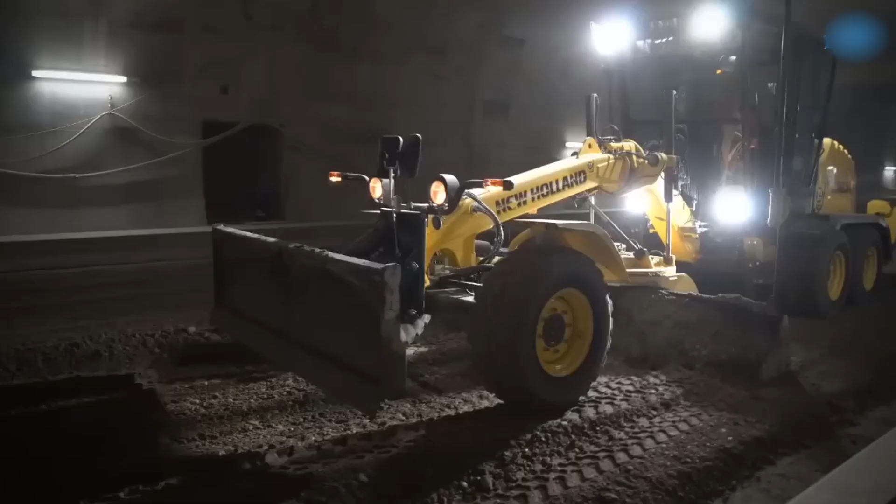To tackle the unique engineering challenges posed by the project, Norway has fostered collaborations with local universities and international experts. The Norwegian University of Science and Technology, the University of Stavanger, and Chalmers University of Technology are among the institutions working closely with the NPRA to develop innovative maintenance solutions. By leveraging the collective knowledge and expertise of these partners, the project aims to create a robust and resilient infrastructure that can withstand the test of time.

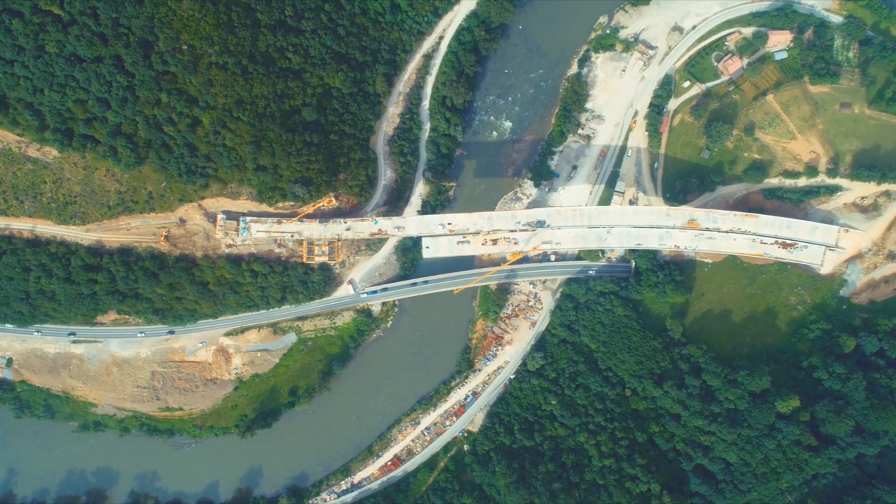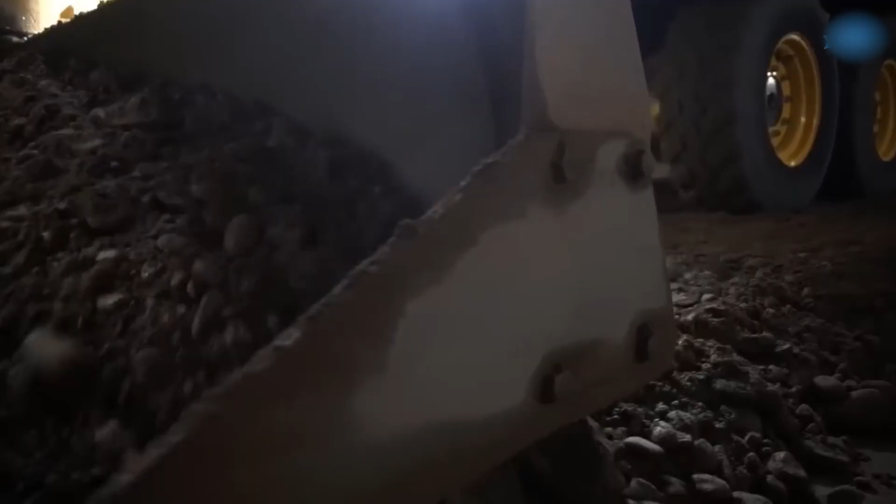One critical aspect of the maintenance strategy involves preparing for potential emergencies such as fires or explosions caused by collisions between large vehicles or trucks carrying hazardous materials. To this end, the NPRA plans to conduct small-scale fire and explosion tests within the tunnels, allowing response teams to develop standardized exit strategies and ensure quick access to the affected areas.

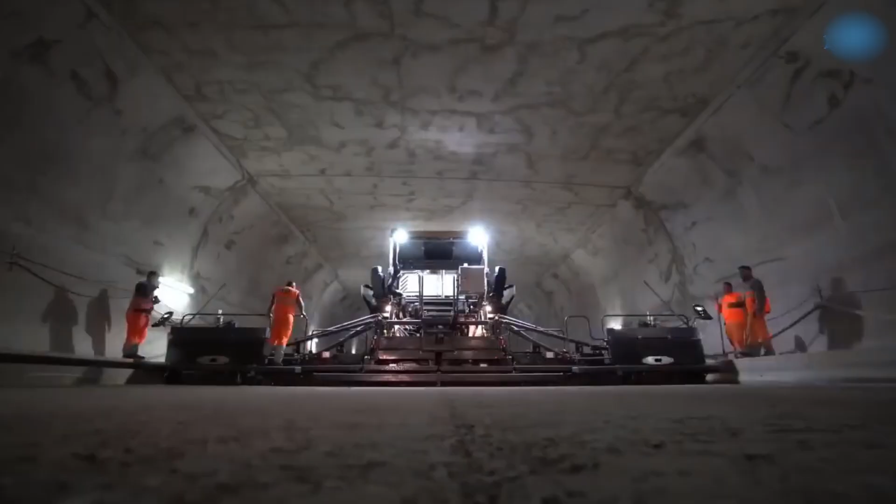The Rogfast Tunnel, a key component of the coastal highway, will feature emergency exits every 250 meters, along with emergency lights and phones at regular intervals, further enhancing the safety and security of travelers. In addition to emergency preparedness, the project also places a strong emphasis on environmental sustainability.

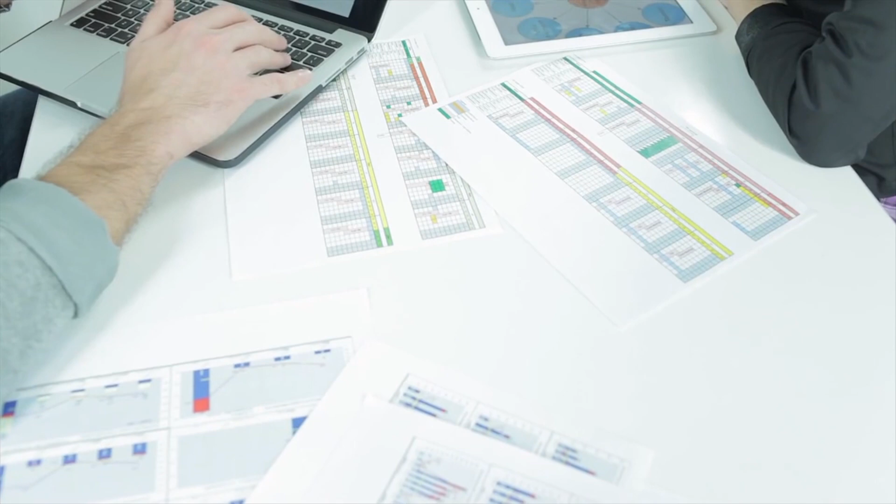The development of intelligent transport systems, such as the use of solar energy to create ice-free road surfaces during the winter months, demonstrates the NPRA's commitment to reducing the highway's ecological footprint while simultaneously improving road safety. This innovative approach to maintenance not only minimizes the structure's impact on Norway's pristine natural landscapes, but also sets a new standard for environmentally conscious infrastructure projects worldwide.

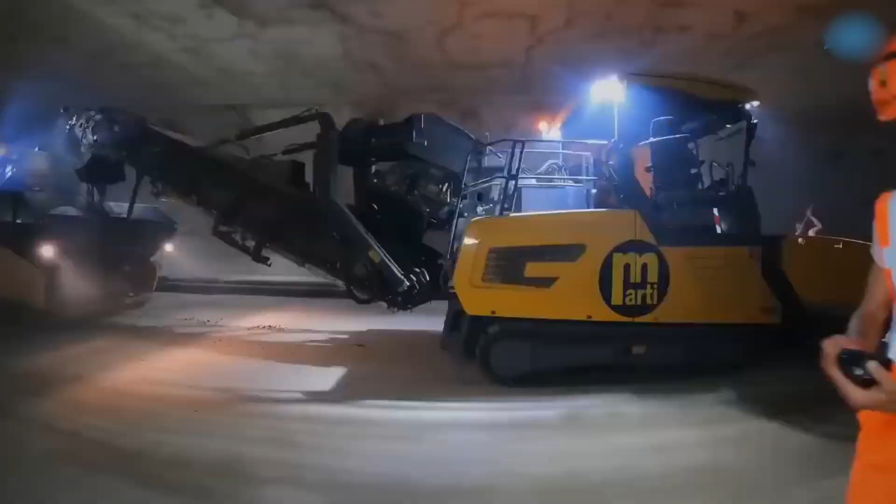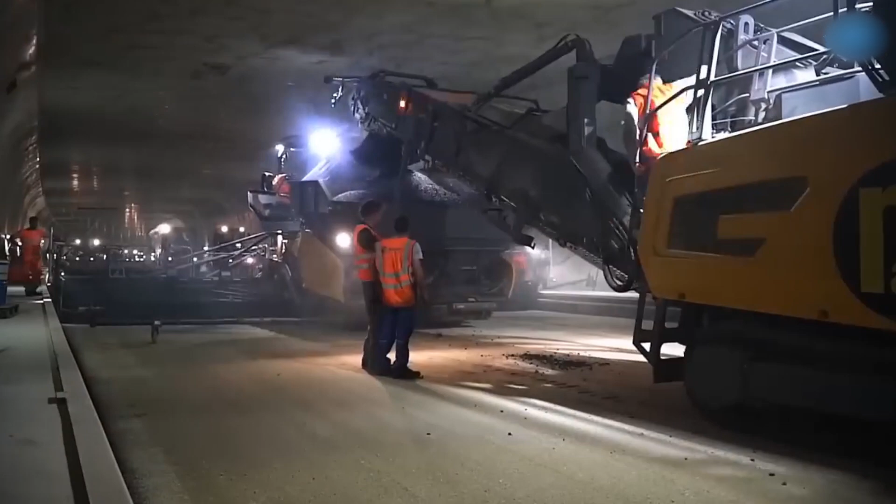The NPRA's extensive research into Norway's natural landscape has been instrumental in shaping the project's maintenance strategy. By studying how automobiles and the environment can safely coexist, the administration has gained valuable insights into the best practices for maintaining the tunnels and ensuring their long-term sustainability. This knowledge will be continuously refined and applied throughout the lifespan of the coastal highway, enabling the structure to adapt to changing environmental conditions and evolving transportation needs.

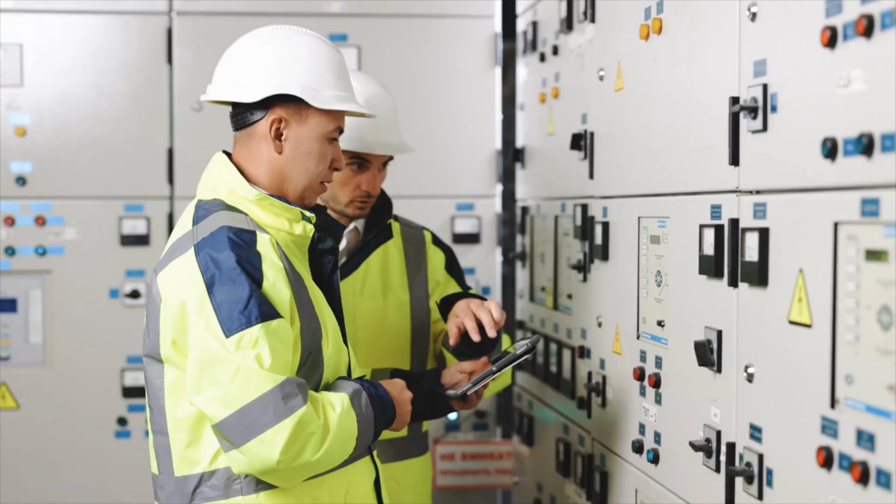As the E39 Coastal Highway project moves forward, the successful implementation of its maintenance strategy will serve as a testament to the power of collaboration, innovation, and environmental stewardship. By bringing together local and international expertise, embracing cutting-edge technologies, and prioritizing sustainability, Norway is setting a new benchmark for the development and maintenance of large-scale infrastructure projects.